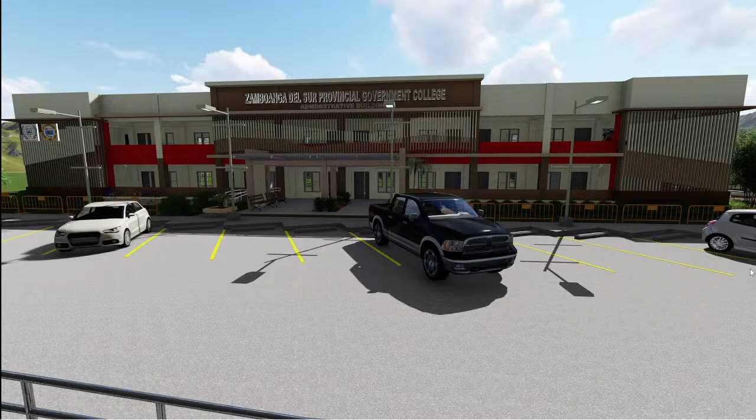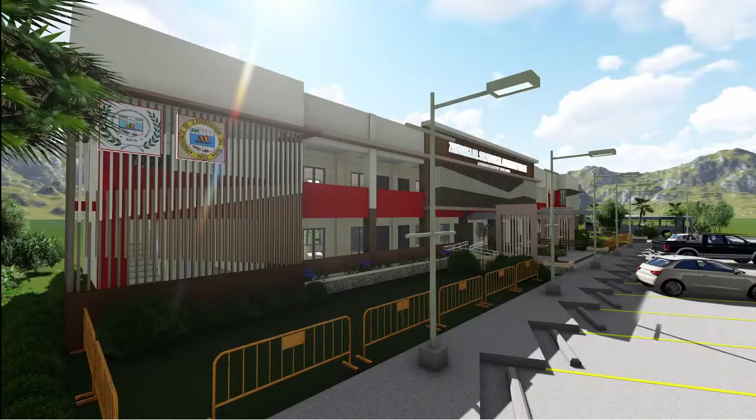This is a two-story, 8-classroom building located in Tabina. This is designed to the best standards with variations from the DPWH, so we can fit the fund for the proposed project. It consists of 8 classrooms with a public restroom for male, female, and PWD, located on the ground floor. This design is typical for most of the GBS PGT projects for cluster projects.

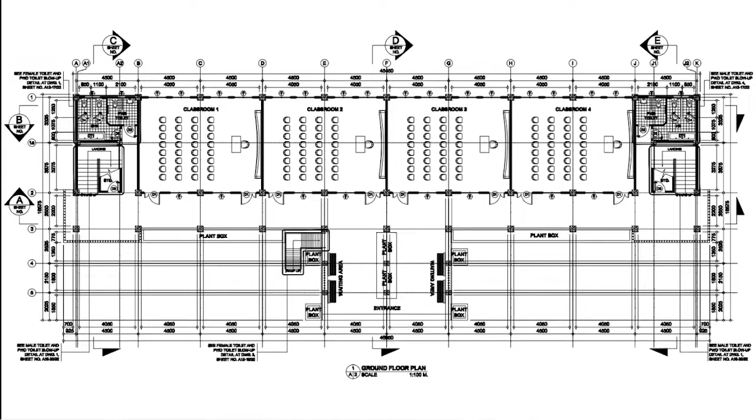As you can see, we have 4 classrooms with chairs and blackboards, and the PWD CR has proposed stainless steel kick plates, accessible stairs. This is without furnishing for tables and chairs, only the structure itself for the project. I think that's all for the two-story building in Tabina.

Thank you very much, Architect Briones. Is there any additional concern from the different sections? How about the materials and quality control section, do you have any additional concerns? For the construction section, how about for the maintenance?

Okay, so let's proceed to our technical working group for the concerns. Before we proceed with that TWG, there are still two civil work projects which are included in this pre-bidding conference.

One is the 25 JG 0062, repair maintenance of DPWH building Zamboanga del Sur Second DEO main building, Poblacion, Guipos, Zamboanga del Sur, with an ABC of 1,500,000 and contract duration of 85 calendar days.

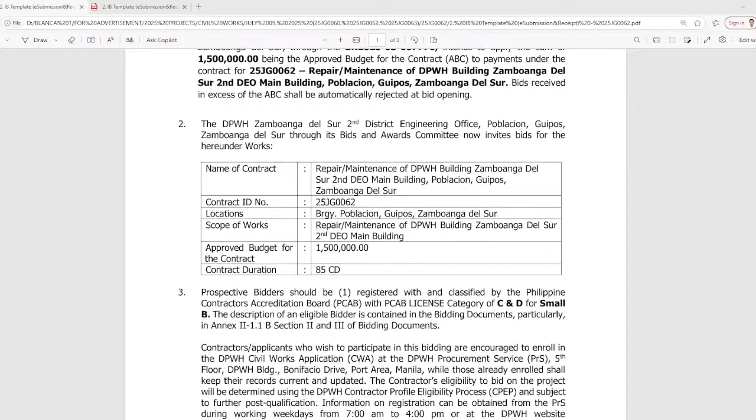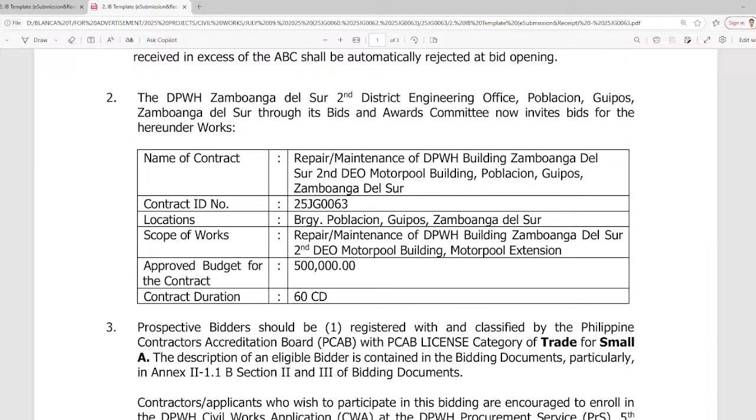And the other one is the 25 JG 0063, repair maintenance of DPWH building Zamboanga del Sur Second DEO Motorpool building, Poblacion, Guipos, Zamboanga del Sur, with an approved budget for contract of 500,000 pesos and contract duration of 60 calendar days. May I call on the maintenance section to discuss or elaborate further the scope of works for these two civil work projects.

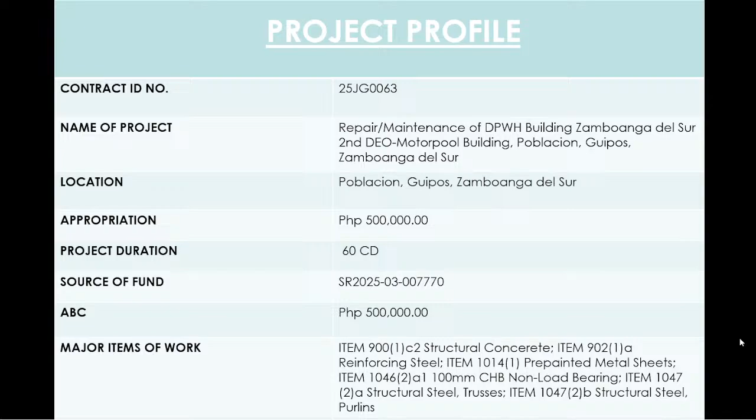Next, so we have the scope of works. Item number, part 2, other general requirements. B.5 project billboard signboard, 3 each. B.7 occupational safety and health program, 1 each.

So part A, we have item 8031A structure excavation common soil, quantity of 8.91 cubic meters. Item 8041A embankment from structure excavation, 2.43 cubic meters. Gravel fill 804(4), 1.33 cubic meters.

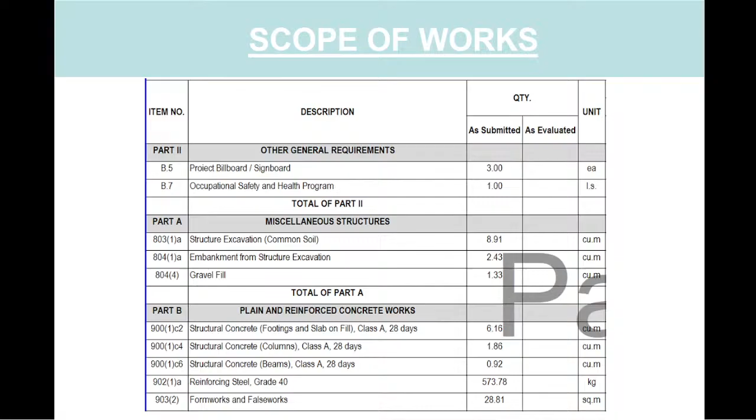Part B: item 900(1)c2 structural concrete footings and slab on fill, 6.16 cubic meters. Item 900(1)c4 structural concrete columns, Class A, 28 days, 1.86 cubic meters. Item 900(1)c6 structural concrete beams, Class A, 28 days, 0.92 cubic meters. Item 902(1)a reinforcing steel grade 40, 573.78 kilograms. Item 903 formworks, 28.81 square meters.

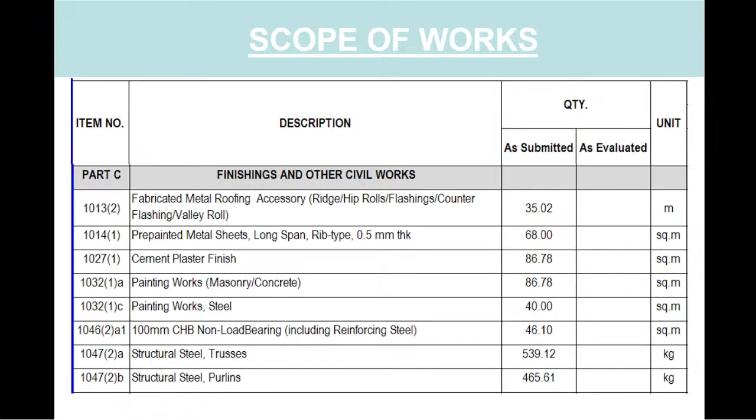Item 1032C painting works steel, 40 square meters. Item 1046-2A1 100mm CHB non-load bearing including reinforcing steel, 46.1 square meters. Item 1047-2A structural steel trusses, 539.12 kilograms. Item 1047-2B structural steel purlin, 465.61 kilograms.

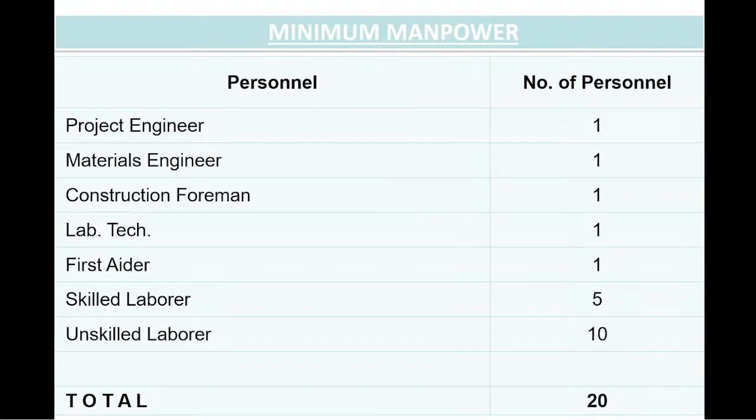So we have the project minimum manpower: project engineer 1, materials engineer 1, construction foreman 1, lab tech 1, first aider 1, skilled laborer 5, and unskilled laborer 10, a total of 20.

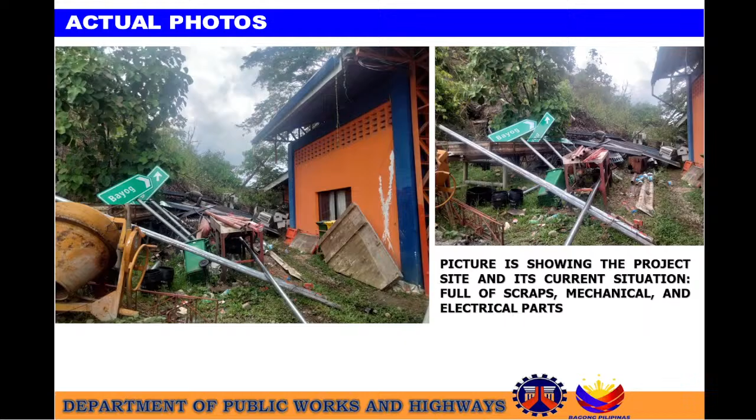Next, vicinity map of our project, and this is the actual picture. I think it's been removed already. Okay next, so they have this extension sa quad.

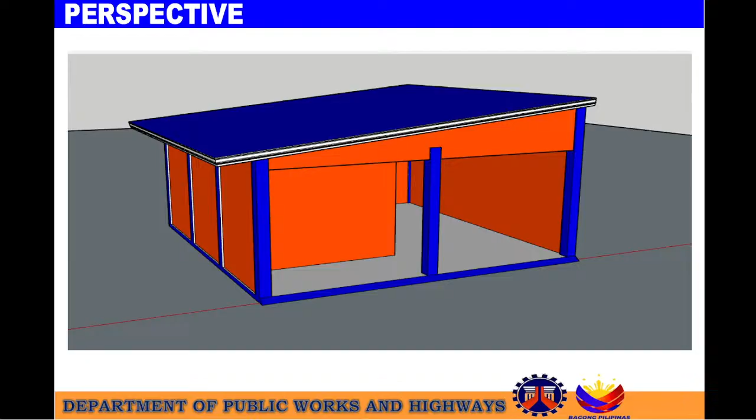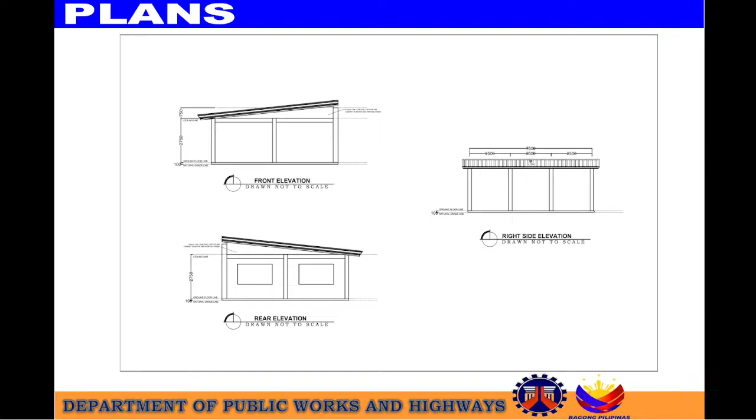Next slide please, we have the elevation: front elevation, rear, right side elevation, front, and next slide please.

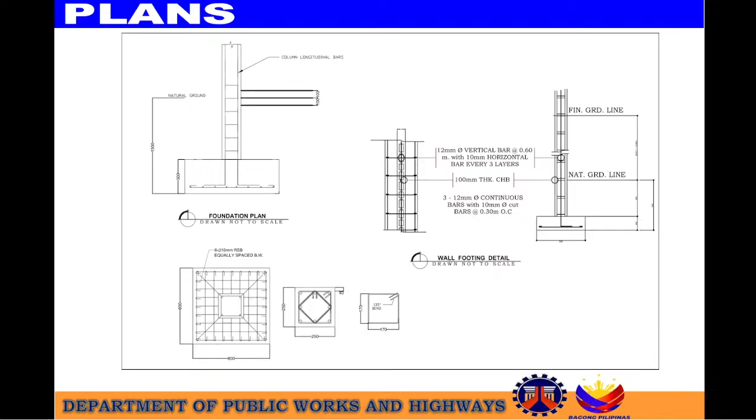So we have the foundation detail: 800 by 800 millimeters is our footing, and the column is 150, I think. Next slide please.

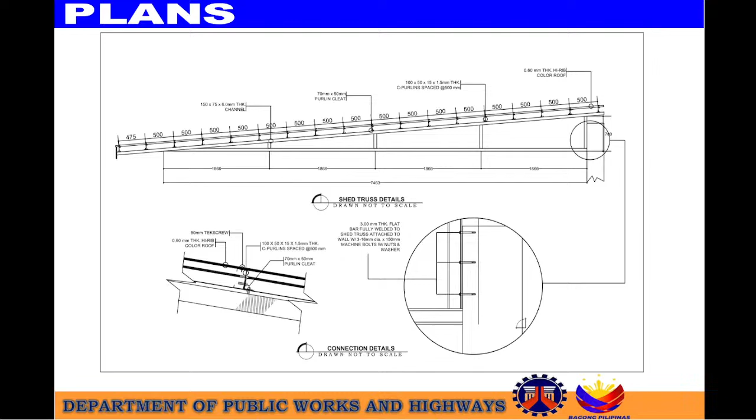So they have the kind of shed truss details. Yeah, there are no changes, sir. That's all for this. Okay, thank you very much.

Okay, thank you very much, Engineer Luna. So for the discussion of the technical working group for the concern, may I call on Engineer Puerto.

Good morning. For DPWH concern, for infrastructure project,

Bidders shall submit their bids through their duly authorized representative using the form specified in the bidding documents, in 2 separate sealed envelopes, or in case of electronic bid submission, shall submit 2 password protected bidding documents in a compressed archive folder. The first envelope shall contain the following technical documents: at the least, PhilGEPS certificate of registration and membership in accordance with section 8.5.2 of the revised IRR, PCAB license and registration or special PCAB license in case of joint venture, statement of all ongoing contracts government and private, statement of single largest completed contract, NFCC, joint venture agreement, bid security in the prescribed form, amount and validity period.

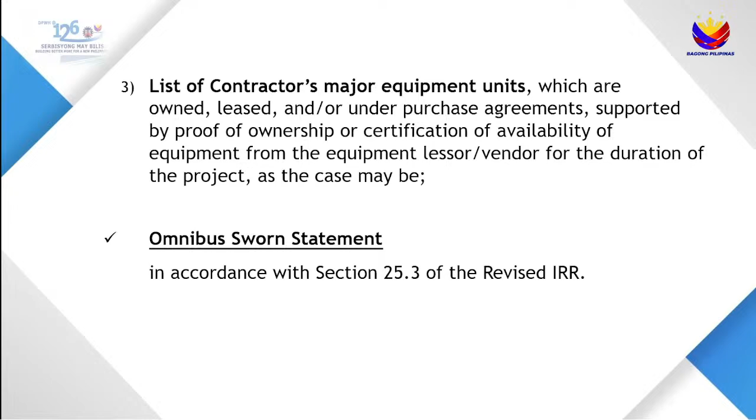Next is the omnibus sworn statement in accordance with Section 25.3 of the revised IRR.

Second envelope shall contain the financial documents: the bidder's audited financial statement showing, among others, the bidder's total and current assets and liabilities, stamp received by the BIR or its duly accredited and authorized institution for the preceding calendar year, which should not be earlier than 2 years from the date of bid submission.

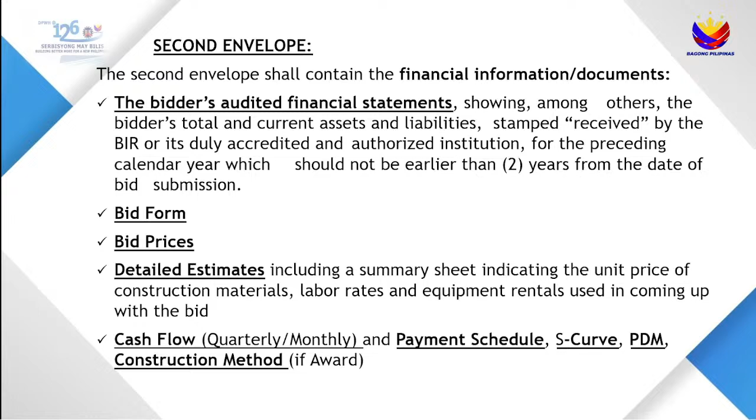Next is the bid form, bid prices, and detailed estimates, including a summary sheet indicating the unit price of construction materials, labor rates, and equipment rentals used in coming up with the bid, plus cash flow in quarterly or monthly terms, payment schedule, and S-curve/PDM construction method if awarded.

Note that bids shall be received by the BAC on the specified date, time, and place specified in the invitation to bid. Bids, including eligibility requirements, submitted after the deadline shall not be accepted by the BAC.

The original copy and copy 1 of the bid shall be typed or written in ink and shall be signed by the bidder or its duly authorized representative.

Unsealed or unmarked bid envelopes, or in case of electronic bid submission, bidding documents not in compressed archive folders and not password protected, shall be rejected. The BAC shall assume no responsibility for the misplacement of the content of improperly sealed or marked bids.

Any missing, incomplete, or patently insufficient document in the above-mentioned checklist is a ground for outright rejection of the bid. Ensure proper tabbing and use A4 bond paper.

Bid evaluation for procurement of infrastructure projects, Section 32. The BAC, through its secretariat, may ask in writing the bidder for clarification of its bid. All responses to requests for clarification shall be in writing.

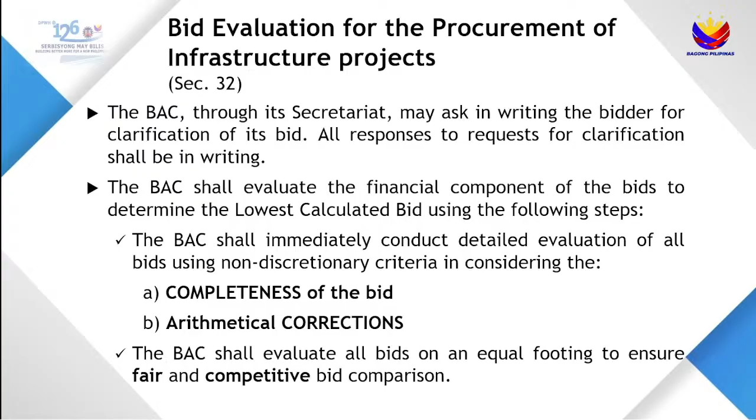In case of discrepancies between bid prices in figures and in words, the words shall prevail. Between the total price per item and the unit price for the item as extended or multiplied by the quantity of that item, the unit price times quantity per item shall prevail.

Between the stated total price and the actual sum of prices of component items, the actual sum of prices shall prevail. Between the cost in the detailed estimate and the unit cost in the bill of quantities, the unit cost in the bill of quantities shall prevail.

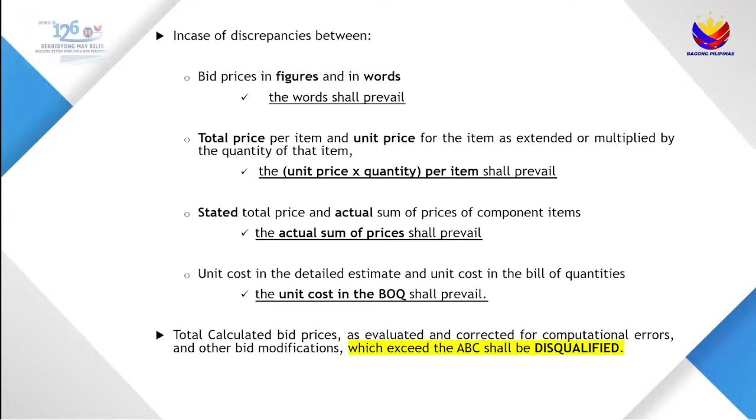Total calculated bid prices, as evaluated and corrected for computational errors and other bid modifications, which exceed the ABC shall be disqualified.

Modification and withdrawal of bids, Section 26 of RA 9184. A bidder may modify its bid, provided that this is done before the deadline for the submission and receipt of bids. A bidder may, through a letter, withdraw its bid before the deadline for the receipt of bids.

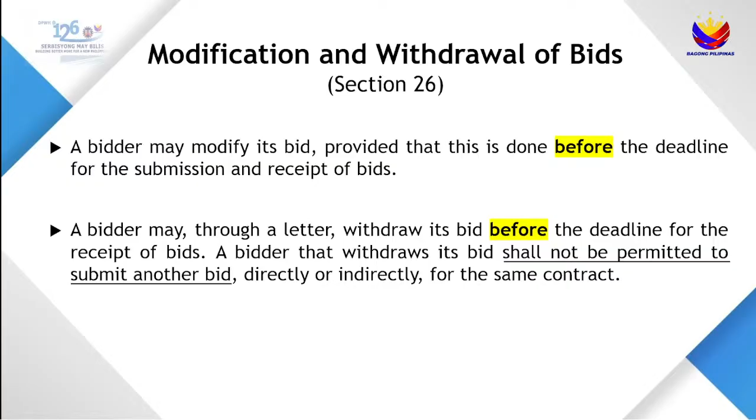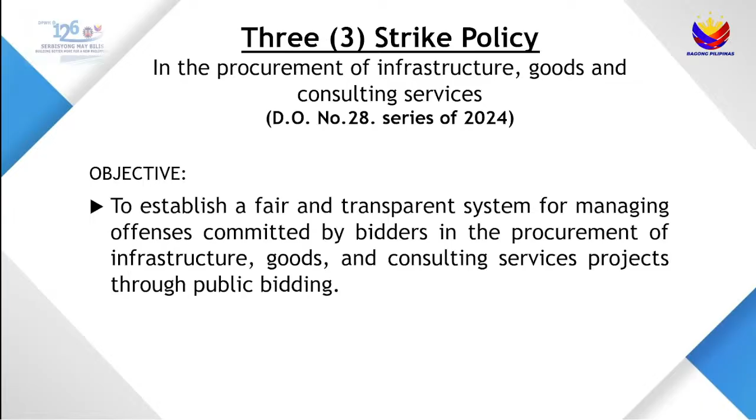Thank you, Engineer Berto. Any other materials? How about additional info? Nothing else on maintenance? Okay, may we call the procurement head for the schedule?

For the next activities, the dropping and opening of bids will be scheduled on July 28, 2025, at exactly 10 a.m. The venue is the Conference Room, ground floor, DPWH Second DEO, Zamboanga del Sur.

So note to our bidders, no late submission of bids shall be accepted. So that's all, thank you.